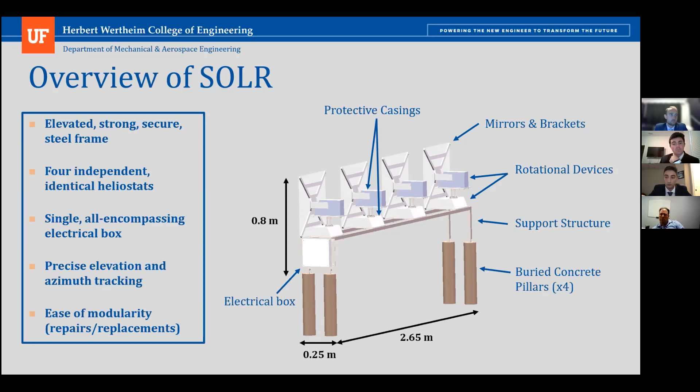To dive a little deeper, here's an image with some callouts. To begin with, the mirrors and brackets: we use square flat plate plexiglass with solar reflective foil. Each mirror is 0.5 meters in both height and width for an area of 0.25 meters squared, so the whole module has a total reflective surface of 1 meter squared.

Attached to the mirror is the rotational devices. Each rotational device is a worm gear driven by a stepper motor connected to a shaft. On the lower end is the azimuth tracker, and on the upper end is the elevation tracker. These are bolted into the welded steel frame, which is secured to the ground via wedge anchors buried into concrete pillars.

The electrical box houses 1 Espressif ESP8266 and 8 individual motor drivers so we have individual control of each motor, allowing different angles on each module for higher accuracy and more efficiency. Protecting each of these components is protective casings on the rotational devices, made out of vacuum molded ABS plastic that seals it off from the environment for a longer lifespan.

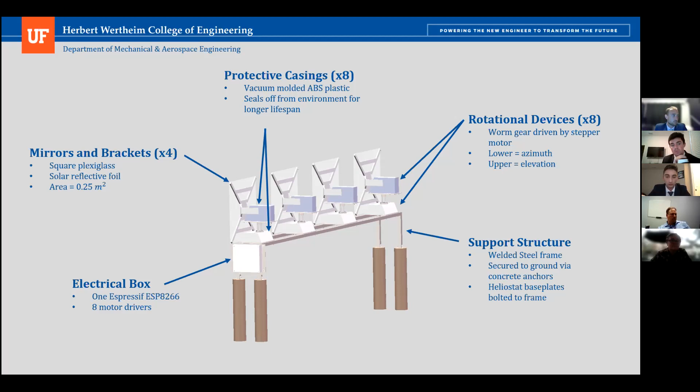I would now like to pass it off to Jose Camacho to dive a little deeper into the mirror and the analysis we conducted. Thank you, Kevin.

This is the mirror subsystem of our heliostat module. The image shown is a view from the back of the mirror showing the support bracket and where it attaches to the mirror. Each module needed to incorporate between 4 and 16 mirrors with a maximum collective surface area of 1 meter squared per module.

The mirror material must have been able to withstand 500 psi of deionized water for the purpose of cleaning each of the mirrors. Each module must be able to reflect 1,000 watts of thermal irradiation to the central receiving tower and provide a total solar concentration ratio greater than 1,000.

This again is a back view of the mirror subsystem. The actual mirror is the lighter shaded region in the back of the image. Each mirror is square shaped with a reflective area of 0.25 meters squared, with a total of 4 mirrors on each heliostat, giving a complete area of 1 meter squared per module.

The mirror is made up of 2 main components: solar reflex foil, a reflective material, with a protective sheet of plexiglass over top. The foil is attached to the plexiglass using E6000 adhesive, as well as additional support from the screws used to mount the bracket. The entire module, composed of 4 mirrors, will be able to provide the central tower with about 1,094 watts of thermal irradiation.

The plexiglass will be able to withstand cleaning procedures with a strength of 20.39 MPa and a Mohs hardness of between 3.5 and 4. Unlike regular glass, which we had in our previous design, plexiglass has a higher impact strength and is easier to attach using bolts.

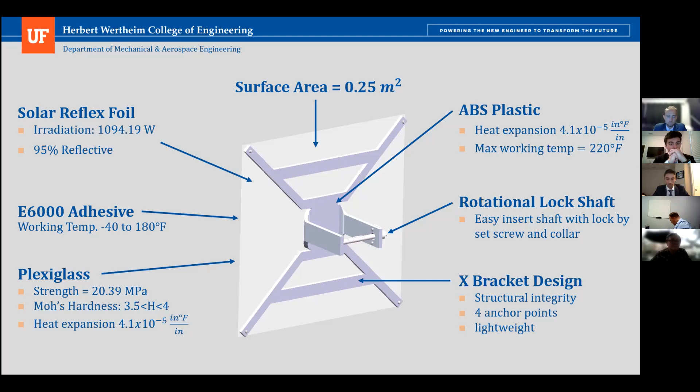The support bracket is made from ABS plastic and attaches to the mirror using 4.5 millimeter bolts on each corner of the square mirror. The heat expansion rates for plexiglass and ABS plastic are very similar, which would eliminate any in-plane forces on the screws on either material. The bracket design was created to reduce weight while still providing the mirror with sufficient support on all ends. The bracket design uses a shaft with collar and set screw locking mechanisms to allow the motor to rotate the mirror in the vertical direction while tracking the sun.

These images show the exploded view of how the mirror and the rotational shaft are attached to the support bracket respectively. The calculation for thermal irradiance reaching the central tower was found using the radiated flux from the sun to the earth, the area of the mirror, the reflectivity of the solar reflex foil, and the transmission efficiency of light through plexiglass. The strength of the mirror was calculated using the fracture toughness of plexiglass and a specified initial crack length. The total weight of the mirror was found using the volume and density of plexiglass and gravity.

Now I will pass it on to Alden to cover the rotational device.

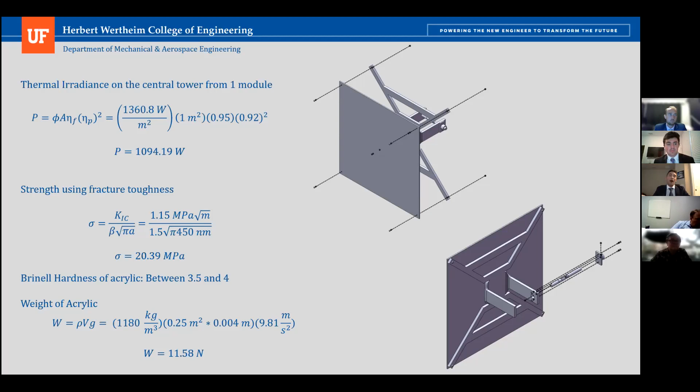Rotational devices are expected to be able to reflect light up to a 100-meter tall tower without exceeding optical losses of 40%. The rotational range of the azimuth tracker should be greater than 150 degrees. And the elevation tracker should be able to rotate up to 90 degrees from a starting point of 10 degrees. Parts within each tracker are off the shelf or are custom made at equal or lesser value.

Driving mechanisms are composed of cheap electrical motors that provide the actuation about each axis, and they must be able to connect to a standard 110 to 120 volt grid with the ability to withstand the environmental conditions of the Nevada desert.

Both of these tracking devices utilize a worm gear drive in combination with the NEMA 17 stepper motor in order to rotate their attached subassemblies. The azimuth tracker is used to rotate the elevation tracker about the vertical axis of the azimuth shaft, and the elevation tracker is used to rotate the reflective surface about the horizontal axis of the elevation shaft.

The worm gear drive is composed of a high carbon steel worm and a brass worm wheel and has a stage ratio of 40:1 to increase the tracking accuracy of both devices. Steel worm is attached to the rotor of the NEMA motor to allow for actuation, yielding a full 360 degrees of rotation about the vertical axis and 180 degrees of rotation about the horizontal axis.

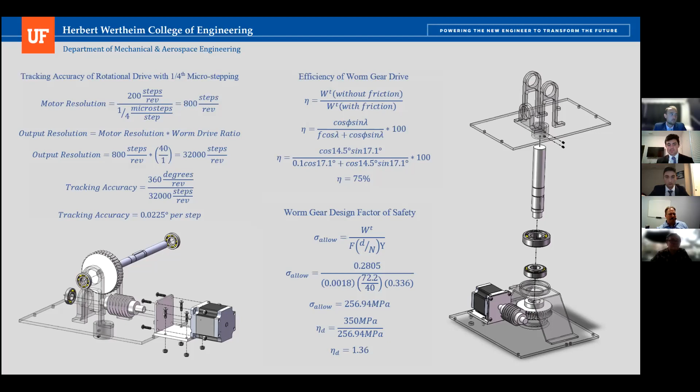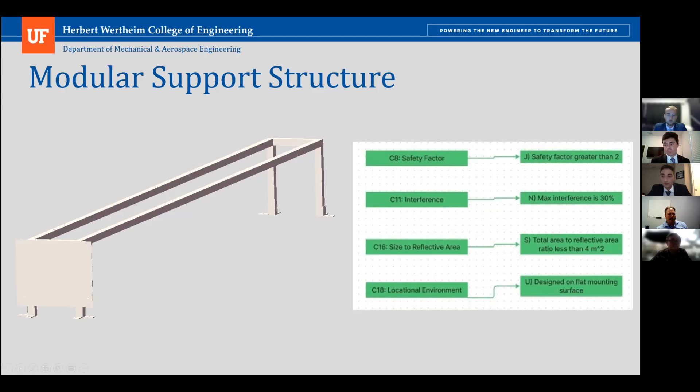The support structure is the frame on which the rotational device and mirror are mounted. It's constructed out of 1 inch by 1 inch welded steel tubing. We opted for a welded steel frame because of its high strength and ability to be easily welded.

Because it is entirely welded, there's no on-site assembly other than bolting it to its pre-laid flat concrete foundations, which use concrete wedge anchors.

On the bottom left of the image, you can see the square electrical mounting box. In this configuration, technicians have easy access to all the electrical components if repairs or maintenance are required.

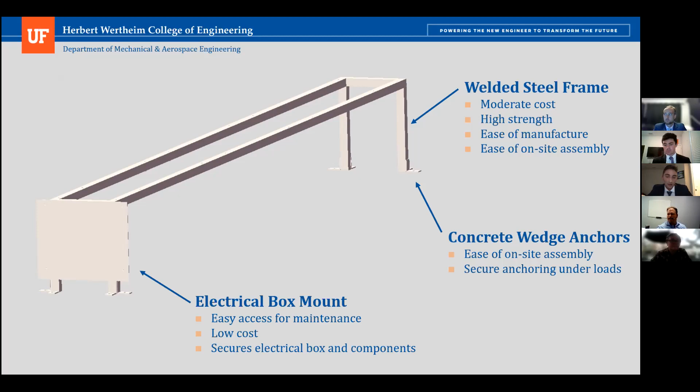A sum of the forces in the y direction yielded reaction forces of 0.294 kilonewtons. So the maximum shear force on the structure is about 0.3 kilonewtons.

I'll now pass it on to Connor. He'll tell you about the electronics box.

Thanks, Dante. Let's get into the overall electronics used in our design, not including the motors. As you can see, there's limit switches, motor drivers, and a singular computer.

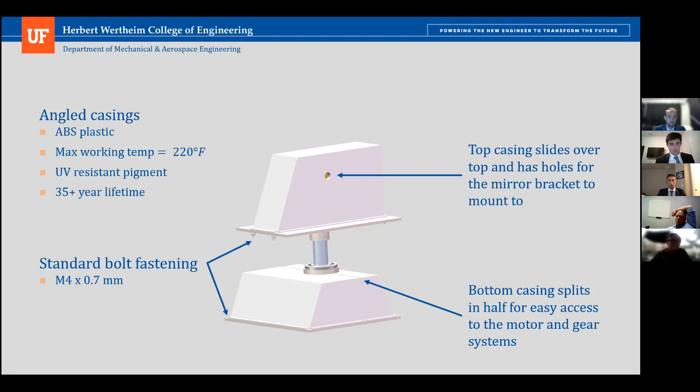So we used standard bolt fastenings to attach the casing to the platforms below. The top casing slides over the shaft and hinges on the top seam. The bottom casing splits in half for easy access to the motor and gear systems. Here's an exploded view of how the casings would attach to the platforms below.

It is fairly simple. The reason we went with angled casings was for a little bit more wind resistance, as well as structural integrity.

So the two main issues we faced with the protective casings were heat transfer, making sure that the components inside were not suffering too much heat, and also the protectability. We assumed through the seal that the casings would protect the components, and Connor Duffy is going to go over how the heat transfer worked out for the casings.

Thank you, Kevin. Kevin just mentioned the reason we chose ABS plastic. One of the main reasons was the heat transfer between an ABS plastic and, let's say, a metal protective casing. The motor is going to be working hard inside this protective casing, and you want to make sure it doesn't heat up too much. The maximum surrounding temperature to ensure our stepper motors remain functional is 212 degrees Fahrenheit, and the hottest recorded temperature ever in the United States was 134 degrees. So we used this extreme scenario to make sure our motors would remain functional.

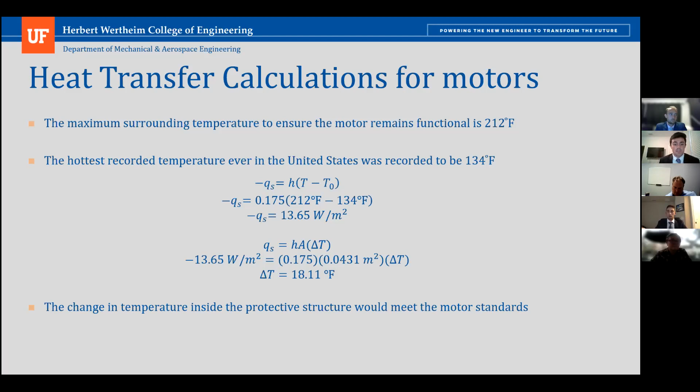In the first set of equations, we calculate the heat flux to be 13.65 watts per meter squared. You can then use this heat flux along with the heat transfer coefficient of ABS plastic, which is 0.175, to get a change in temperature in this scenario of roughly 18 degrees. So even in this extreme scenario, inside the protective structure, the ABS plastic is only going to allow the temperature to increase 18 degrees, which is well below what our motors need to continue running. I'm going to pass it right back to Kevin to do some wind calculations as well.

Another environmental factor we were really concerned about is the high wind gust presence in the desert. So we created a high wind safety mode in which all of the mirrors would be returned to a horizontal orientation, which we believe would limit the drag and lift forces present. However, our major concern was that the lift and variations of the wind could tilt the mirror enough so that it could become uncontrolled.

So we did a holding torque and lift calculation to see if our plate would move within these conditions. The holding torque of the motor was found to be 50.4 Newton meters, including the gear ratio. However, it's likely higher because we used a worm gear.

We then conducted lift analysis on the flat plate at 90 miles per hour, the highest recorded wind speed at this location. We have a coefficient of lift at roughly 12 degrees angle of attack for a flat plate when installed, and our assumption was that the variation in attack angle of the wind would not exceed this number. We then calculated the force from lift and the torque acting on the quarter chord, which we found to be 40.47 Newton meters. This was less than our holding torque.

So we can assume at the high wind mode, the mirror is not going to shift out of location or become uncontrollable, which is great for our design. Now I'm going to pass it on to Matthew Liffrig to discuss the costs associated with our design.

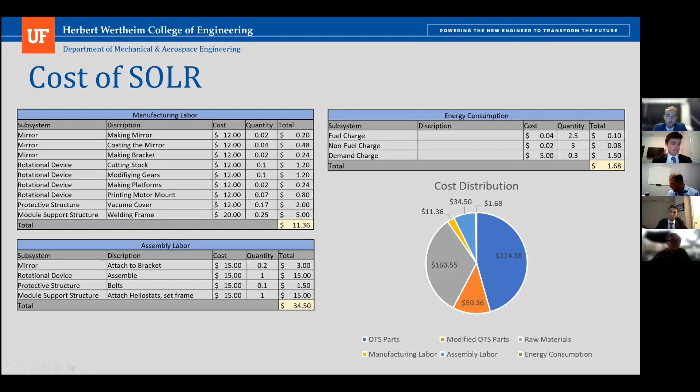First off, I'd like to start with the OTS parts. The OTS parts are pretty expensive due to the fact that we selected stepper motors rather than servo motors. We made this decision based off the fact that we want to have a holding torque.

This system needs to be able to run in windy conditions, and the holding torque holds the mirrors in place and makes sure that they stay focused in the position that they need to be.

In addition to that, we also have to purchase 8 motors. This is because we have a modular design, and each heliostat module moves individually and can point in different directions if necessary for the utmost accuracy.

Finally, moving over to the modified OTS parts, our worm gear is a modified OTS part because it is cut in order to reduce the space used within the protective casing.

Now to raw materials. The raw materials are pretty expensive due to the fact that we have 4 separate modules, so our support structure is pretty large. This is also made out of steel, which is a fairly expensive material, but we chose to do this based off its strength.

It should be noted that if you were to do the price per each module in the heliostat, our cost would be a lot closer to the need statement.

Secondarily, our module can definitely fit larger mirrors. We've selected our mirror size based upon the need statements, but our design is robust enough to fit bigger mirrors, and that would reduce the cost per meter squared.

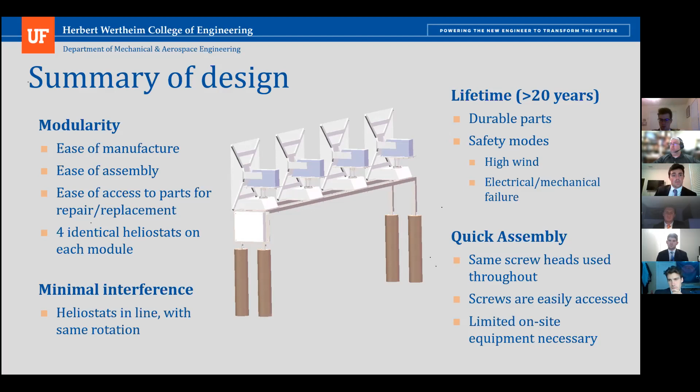And then after that, that's going to be everything for us. And we're going to take questions at this point.

Hey guys, this is Tom Singer from Northrop Grumman.

What was your customer need on cost? So the cost limitation was that the goal was 100 per meter squared of reflective surface. So, what are you at? One more time, what are you at? We're at approximately $500.

$491.73. That's pretty pricey. And if I remember from your diagram, I believe you were showing 8 individual motor controllers for each of the individual motors, and in your cost estimate, you had 1, I believe. So that adds another. I think those were $16 a piece or so. So that's going to add another $100 or so to your cost, right?

So you're way, way, way over your customer target. So let's talk about how you got there. You've got 8 degrees of freedom in your system, right? So each of your individual mirrors, or 4 individual mirrors, could be pointing at 4 individual suns, correct?

Yes. How many suns do we have? We have 1. Right. So why are we controlling 4 individual mirrors with 8 individual motors?

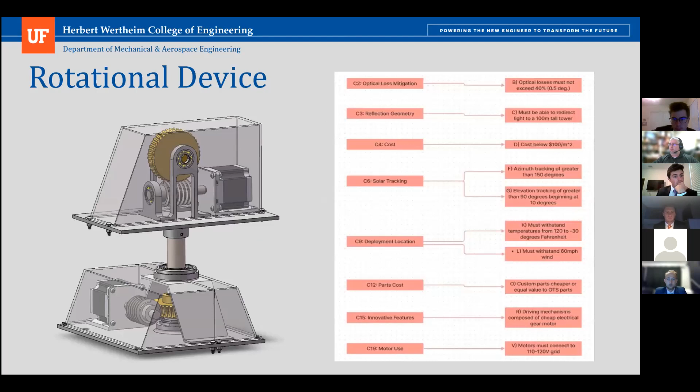So at some point, you got to say we're not even in the ballpark of what our customer is asking for. How do we get there? And I think one way to get there is to get rid of probably 6 of your motors.

No, we completely understand. If we were to try and make that cost, I think that's something we could easily do. The thing that we were focusing on was heliostat number, which was relating to the customer need that dictated that the design must include 4 to 16 heliostats.

So that doesn't say they have to be individually controlled. So based off of the document we got, the individual heliostats showed individual degrees of freedom. So that was an assumption that we made going forward, because otherwise, in our mind, there was no difference between 4 heliostats or 4 mirrors versus 1 mirror of 1 meter squared.

We thought the difference in the modules and the number of heliostats was the degree of freedom. Certainly with our design lineup, we could have had, say, 1 motor, even with the 4 motors up top, to control the azimuth tracking.

Whereas other groups may have prioritized price, what we did first was address all the customer needs, including the modularity, which we had made the assumption - that could have been wrong - that it must include 4 individual heliostats. And from there, we tried to make the design as cheap as possible to meet that.

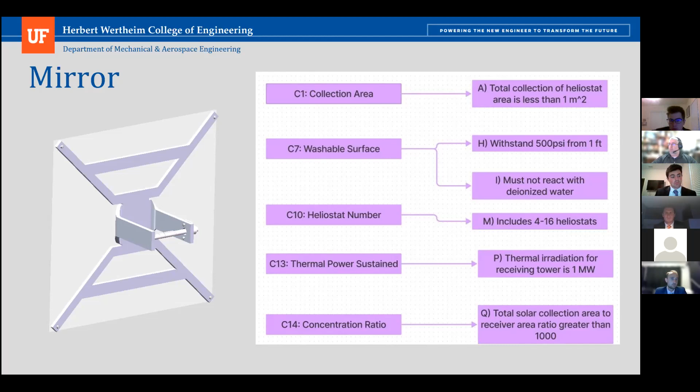Let's say you got rid of your motors, right? So you cut your motor cost. They were about $15 per motor.

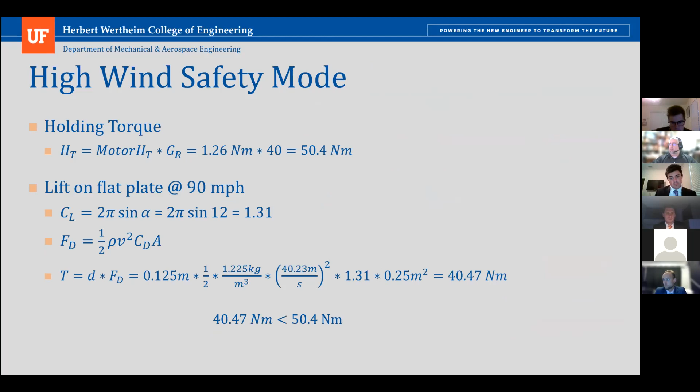So even if you get your motors for absolutely free, right, you're down to like $450, right? Or, your gears also, even without your motor costs, are roughly $150.

Yeah, I mean, you're just way out of bed with your customer's expectation. And you know, if your customer could build 4 heliostats for the price of one of yours, they're not going to go with your design, right? If you can't even get in the ballpark on cost, you're dead in the water.

There's almost no capability you could provide to your customer that would justify a five times increase in cost. No, I completely agree with you. That is very fair. Okay, so that said, I'll move off cost.

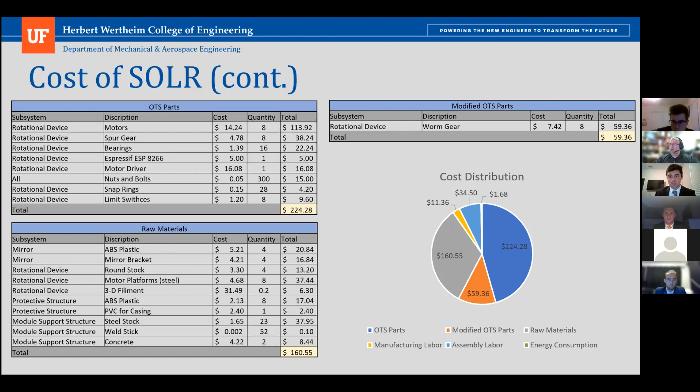I'm a structures guy, and I greatly appreciate that you showed a shear moment diagram when analyzing your beams. I like that. The problem I had was the loading situation. You analyzed for the load of your heliostats, or the weight of your heliostats. But I'm pretty sure your heliostats have big mirrors on them out in wind, right? That's going to load the structure probably a lot more than your weight is loading it. Is that right? Yes. All right, so we can't ignore that as a load case. I would want to see that for sure on your structure.

You mentioned you put some effort into making your housings a little more aerodynamic. I would suggest that is probably not particularly beneficial when you've got a big old sail floating above these things, right? So any effort in making housings aerodynamic is wasted effort.

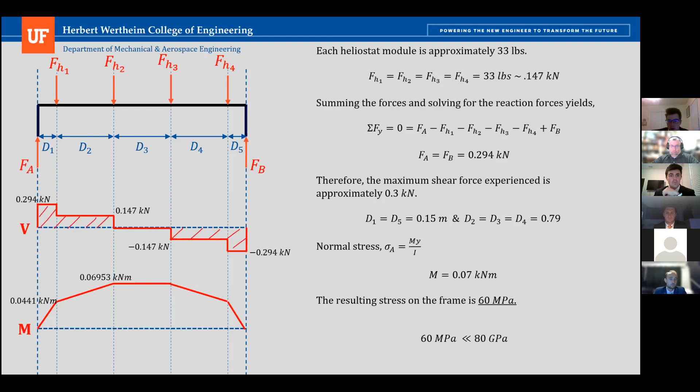That's understandable. As far as the sail and the calculations on the support structure itself, we're not as familiar with aerodynamics, so we tried to analyze the system to what we could, and then build up the system to a capability that we thought could withstand the forces present. Obviously there's a lot of further analysis we could conduct in the long run that we will look into. Yeah, I'd say that's a pretty big miss in terms of the structural analysis here.

Okay, other questions from our panelists? Not entirely a question, but what I saw in the design of your casing, more than aerodynamics, was that the draft angle would make it easier to manufacture. Was that a consideration someone nudged you towards, or not so much? Not as much, but really glad it worked out that way.

I couldn't really see it in the picture, but I am happy that you included limit switches on all the axes. Yay. Thank you. Small celebrations. Yay.

Brad, go ahead. My concern is kind of the uncertainty with the elements in the environment. Given the height of the heliostats above the ground, it looks like they're pretty close based on the total height. So I think sand erosion, or the constant wear of sand on the plexiglass, might be an issue. And as far as sand and other particles getting into the enclosure or into the ball bearing that's exposed on top, it looked like I wasn't sure the ball bearing shown on the lower motor assembly was exposed through the casing. Maybe it's actually covered, but it looked exposed. Is that open to the elements, or is that covered?